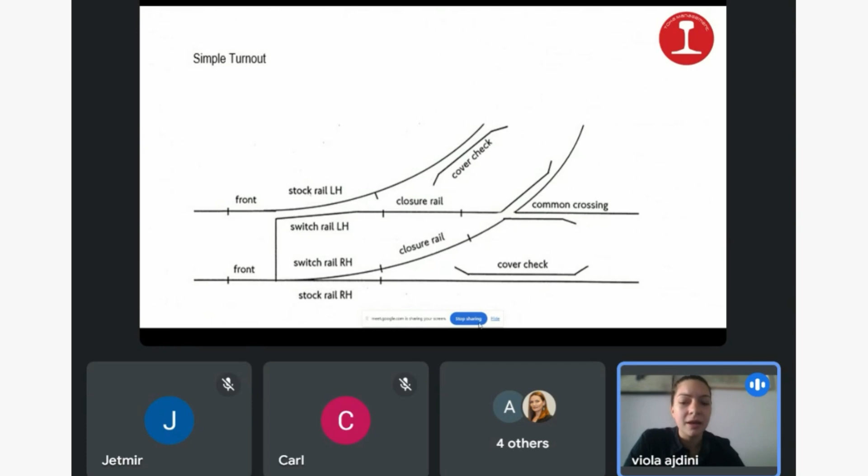Thank you for joining us today for what promises to be an insightful and engaging webinar. We're thrilled to welcome our esteemed guest speaker from Northern Ireland, Carl Hoey, an expert in the field of railway operations and inspections. Britain has had a long-standing and fruitful relationship with Kosovo, characterized by ongoing investment and collaboration across various sectors. This partnership reflects a shared commitment to fostering growth and development in Kosovo.

We're excited to see railway knowledge becoming a vital part of this investment. As we work together to enhance the infrastructure and safety of Kosovo's railway system, we believe that the transfer of expertise and best practices from Britain will play a crucial role in shaping a more efficient and reliable transport network. By integrating this knowledge into our ongoing projects, we aim to strengthen the ties between our nations and contribute to the sustainable development of Kosovo's railway industry.

At Toka Training Center, we believe in the power of knowledge sharing to advance the railway industry, and we're excited to leverage this platform to foster growth and innovation in Kosovo's railway sector. We're committed to raising the bar in railway professionalism and safety. Our recent initiative has led to the establishment of a new standard of profession that's been officially approved by the Ministry. This marks a significant step forward in our mission to enrich the railway sector in Kosovo. We're dedicated to ensuring that every aspect of railway operations is meticulously accounted for, and we have plans to develop many more standards that will further enhance the railway profession.

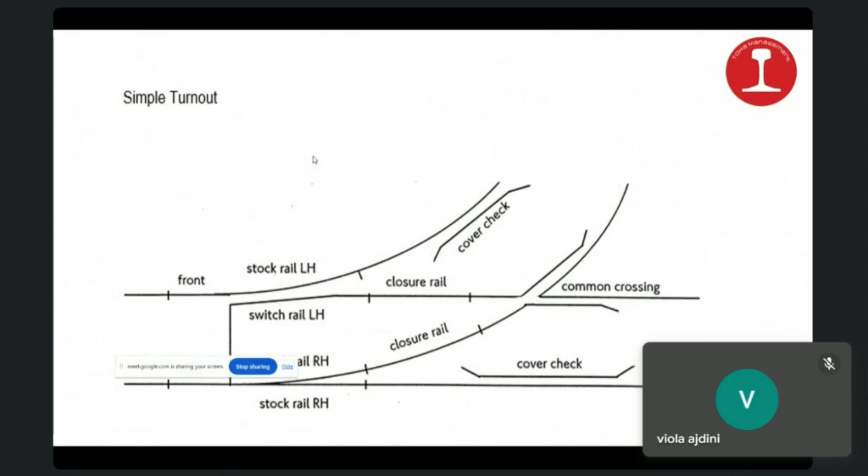On the screen now you have a simple left-hand turnout, and the inspectors will have to get to know all the components that they're going to inspect and what all the nominal readings are. I would expect all inspectors to know the nominals, and then whatever standards are applicable to your railway, that's the standards they will apply when they have gained the nominal readings.

So the inspectors will do an initial 10-minute walkthrough going through the P&C, and what they're going to be looking for is any emerging substandard conditions that may require immediate actioning.

So the inspectors, for the safety of the line, they're going to be looking for broken switches, broken rails, broken joints, broken welds, anything that's going to immediately stop the traffic, and broken crossings.

And then what the inspectors are going to do, if in fact they have found an immediate substandard condition, is action it straight away. And in the event that they have not found any emerging substandard conditions, then they will start their inspection.

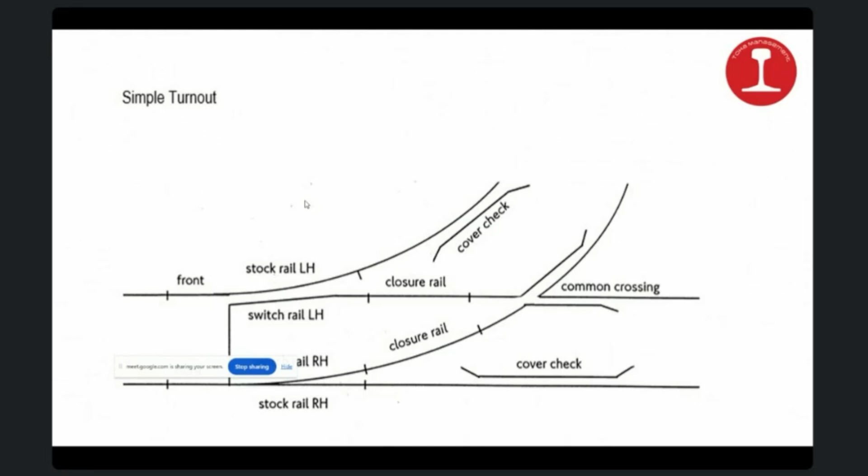What you'll always find with the fabricated common crossings is the point rail will always be attached to the most commonly used route. And the inspector, when inspecting the crossing, will be looking for major defects - any cracks or breaks, any loose, broken, missing, or damaged components within the crossing layout itself.

He will also do a full inspection from the wing rail fronts until the heels of the crossing. Every fault that he finds, he will record on his paperwork, because every inspector will have with him a copy of the previous inspection. So he is already aware of a lot of the defects within the P&C, and what he's looking for is new defects within the P&C.

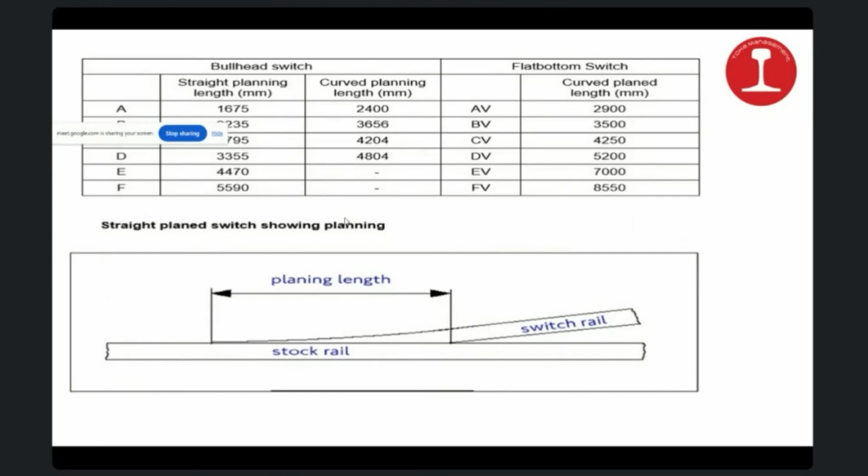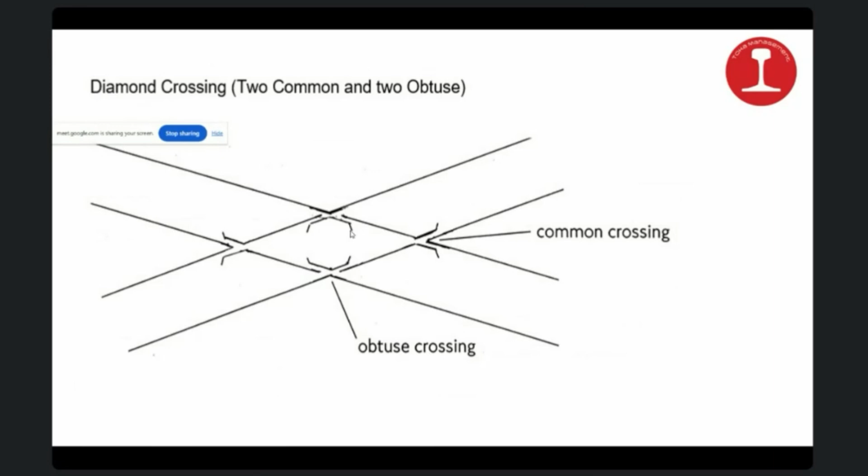And here you have the diamond crossing with the two common crossings to the sides and the two obtuse crossings above and below. All good junction work inspectors will be able to recognize all different styles of junction work layouts that they're going to go to inspect. This is all captured within their mentoring processes.

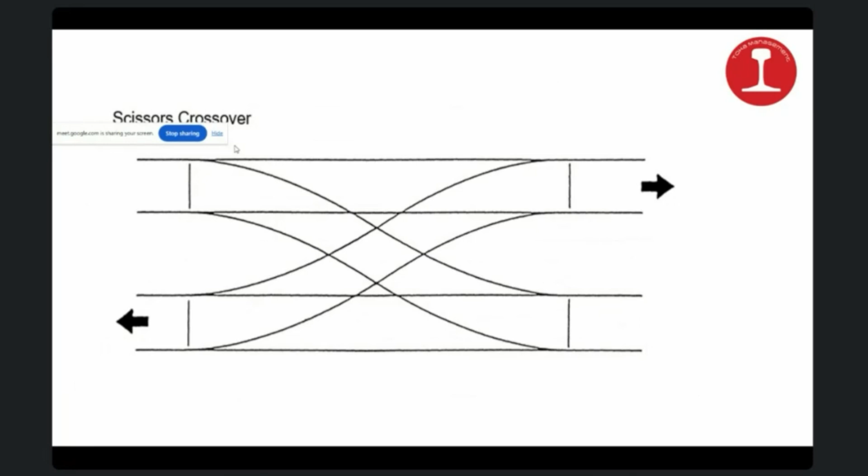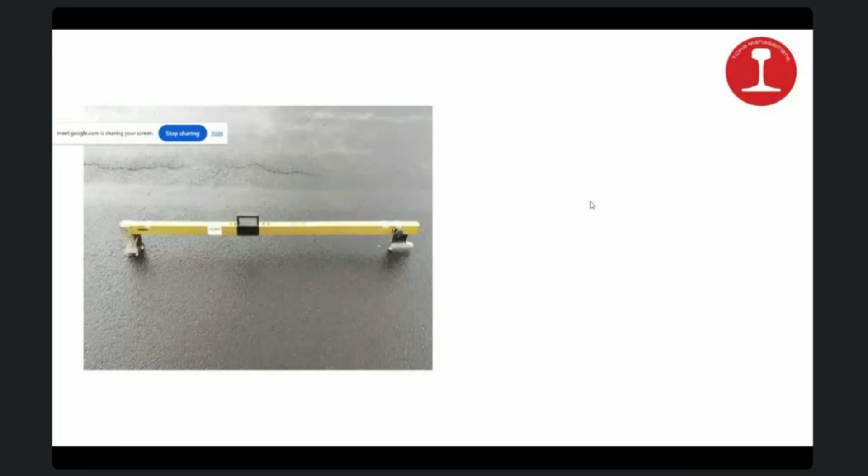Next we have a picture of the Geismar track gauge. This is the most commonly used gauge that we have for doing track gauge and track cant readings. All inspectors will attend a training course which will give them a license to use these gauges. All gauges will be calibrated for 1 year, and inspectors can also check the gauge on track in a self-calibrating routine, just to confirm that the gauge is within working specifications.

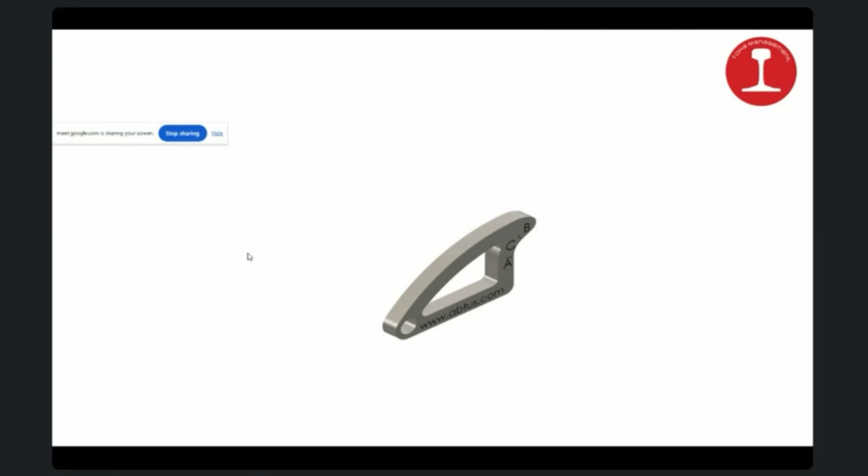The next gauge the junction work inspector is going to use is called the P8 gauge. The P8 gauge replicates the profile of a wheel flange, and it will have a marker for the 60-degree line, which is the critical line for coefficient of friction that can allow a train wheel to ride up the actual switch rail and derail the train.

So what we'll do with this gauge is test along the switch rail, adding any hogging with the stepped gauge to allow you to get an accurate reading, and we would use a 0.3mm feeler gauge with this.

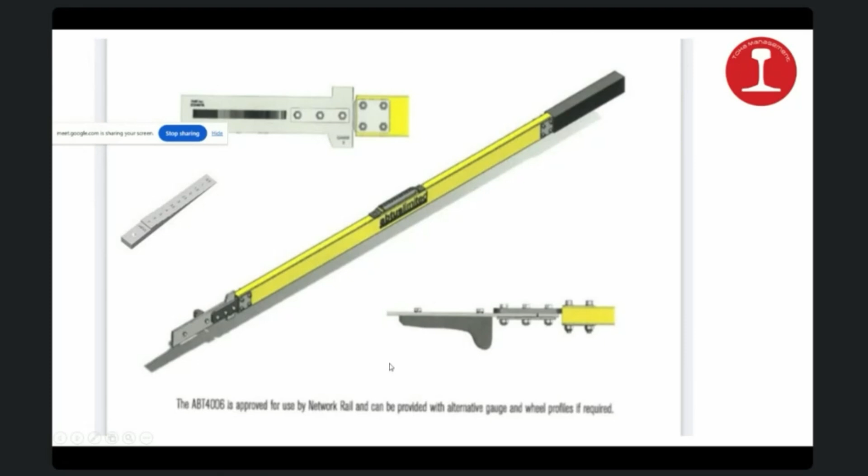Next, we're going to move on to the switch itself. So we have our 5 critical hazards on the switch rails.

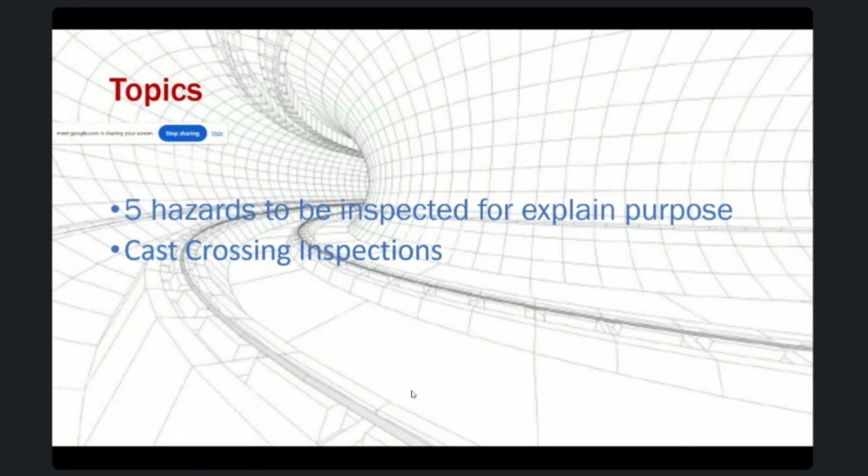The first critical hazard is a side-worn stock rail with a little used switch. The second hazard is the stock rail and switch rail are both side-worn. Hazard 3, the stock rail head wear is associated with a less head-worn switch. Hazard 4 is switch rail damage. And hazard 5 is the switch rail with a sharp gauge corner profile. This is where we would use our Pac-Man gauge.

We want to see contact at point A and point B, but not at point C. We're going to jump onto some slides now because this inspection is our best way to prevent derailments at switches. The reason we have a lot of derailments at switches is because our trains are only designed to go straight. Once you move a train to a different direction using switch rails, the hazard then becomes the train wanting to derail. So what we do is these inspections so that we can be aware of any wear patterns along the rails that may instigate a derailment of a train.

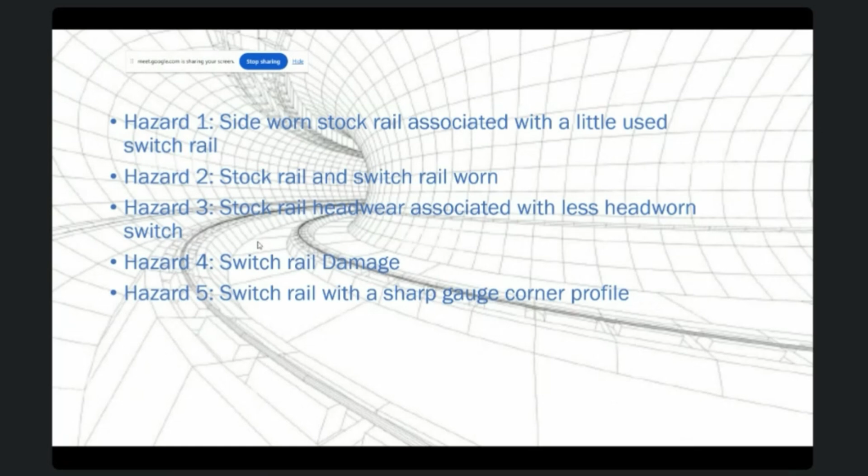You can see on this diagram where you have 3 different setups. Starting at setup 1, you can see where the stock rail has wear and the switch rail has very little wear. This would allow the 60-degree line to be very high up the switch, which could potentially lead to the train wheel riding up the switch and derailing.

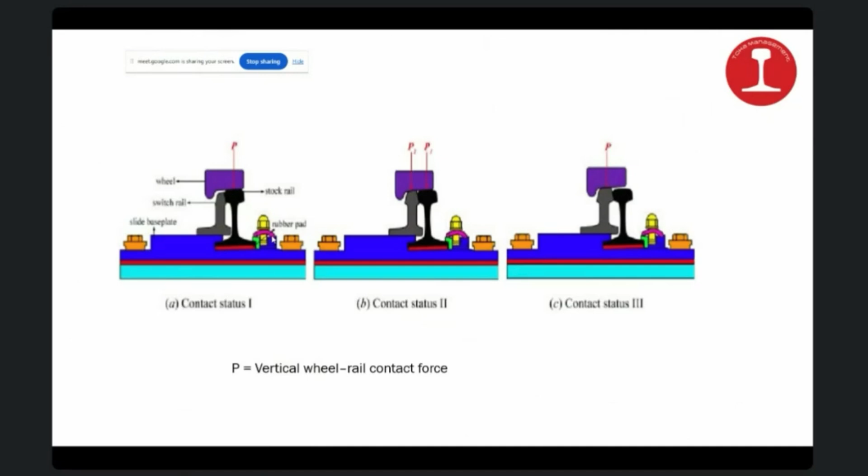You can see contact status 2. The switch rail and the stock rail are both head worn, so they're worn to the same limit. Then on contact status 3, you can see that the stock rail is now heavily head worn and the switch rail is head worn less. On this style of defect, the potential is for the train wheel to enter the switch and strike the switch before it goes into the turnout route, again causing the train to derail.

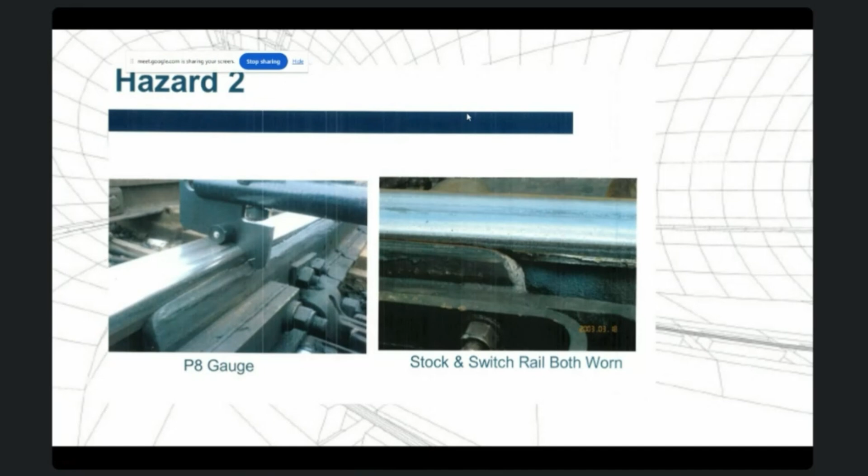Because now what they've added to the P8 gauge itself is they've added the traffic light system. So green to the upper scale is good, and red to the lower scale will be bad. I've added an additional picture of this so that you can see it on the more modern style gauge. You can see from the second picture where both the stock rail and switch rail are both becoming side worn. So here you have the more modern gauge.

So what you would do is monitor how much it fails by during your inspections, and then you would program in the relevant switch rail reprofiling before it fails. To help the inspectors with being in from the 60-degree line, which is white, to the green zone, the inspector will know that the switch is safe and it's not worn beyond limit.

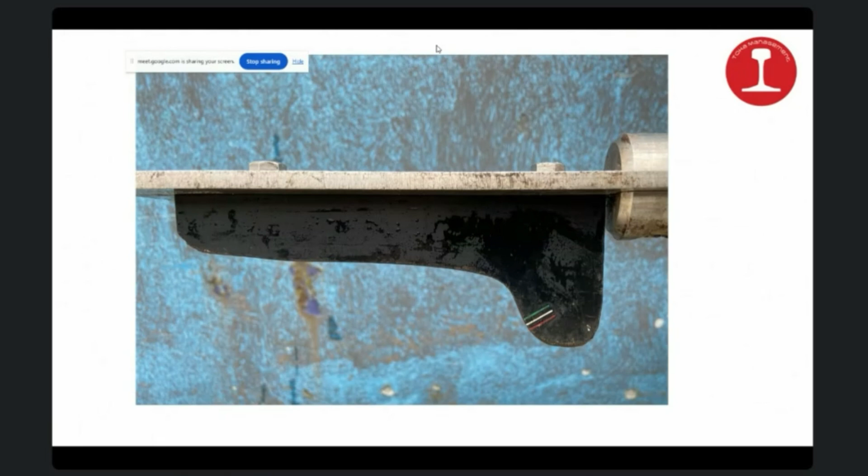We measure the first 40 mil to ensure the first 40 mil along the stock rail is below the depth required by gauge 1. Again, when this fails, the junction work inspector will be monitoring it to ensure that the failure is preempted before it has failed. So when it is approaching the failure limit, he will program in the reprofiling of the switch rail, because that is the remedial action for when gauge 1 is failed.

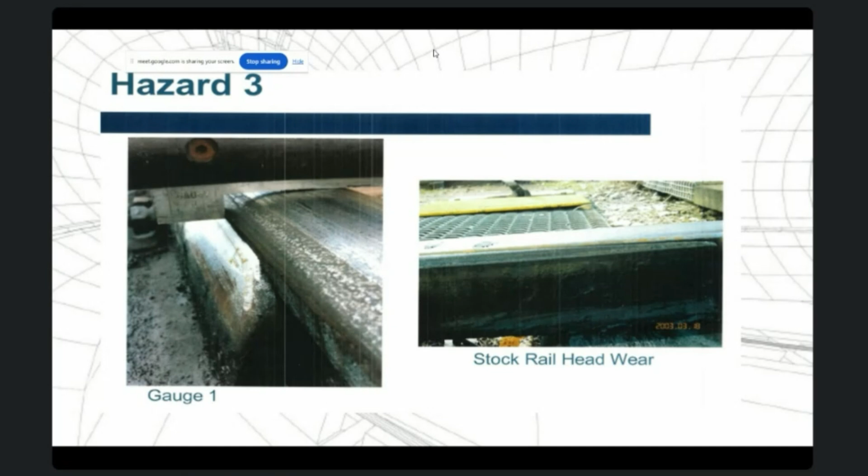The next hazard is hazard 4, which is switch rail damage. With gauge 1, gauge 2, and the P8 gauge, the inspectors must always remember to add any hogging. Hogging is the gap beneath the switch to the slide chair. So the inspector himself, when he starts this inspection, will have recorded all of the gaps and he'll have them on his form, and as he goes along with each gauge, he'll add the gap to the gauge, and that will give him a true reading of what the gauge is telling him.

For gauge 2, what the inspector is looking for is gauge 2 to be above any damage on the switch. When the gauge is above, that tells him he has a critical aspect and that you now have the ability for the wheel flange to climb the switch and then derail the train. With all of these hazard aspects, what we're trying to do again is prevent train derailments. And you can see from the pictures the styles of all these different features that are going to induce the train to derail.

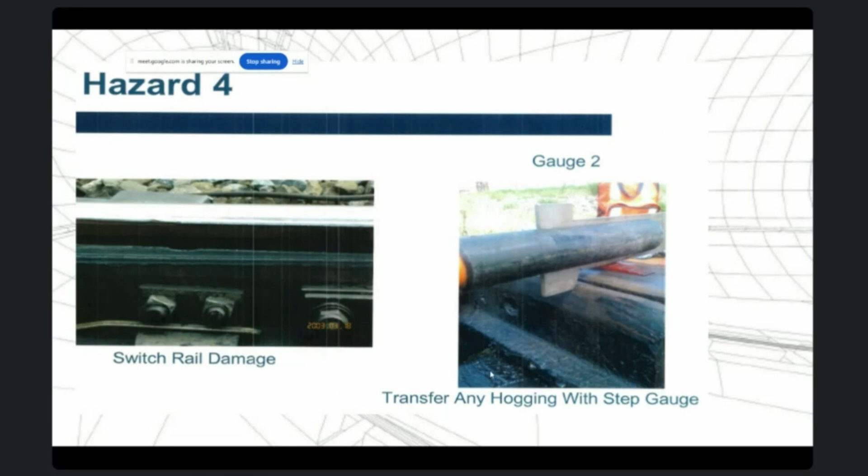So hazard 4, again, the remedial action will be to reprofile the switch, and the reprofiling may include welding of any damage.

Next, we move on to hazard 5. Hazard 5, as you can see on the gauge, you can see point A, which would be the lower section, point B, which would be the upper section, and then point C, which would be right in the corner. And you can see from the first picture on your left, the tactile edge. That tactile edge is what's going to derail the train.

The train is going to grab onto that tactile edge. If it's dry, it's been non-lubricated, and then the train flange wheel itself will ride up it and derail the train. And you can see from picture 2 as well, you have the same kind of tactile edge, but it's lower down the side of the switch rather than higher in the first picture.

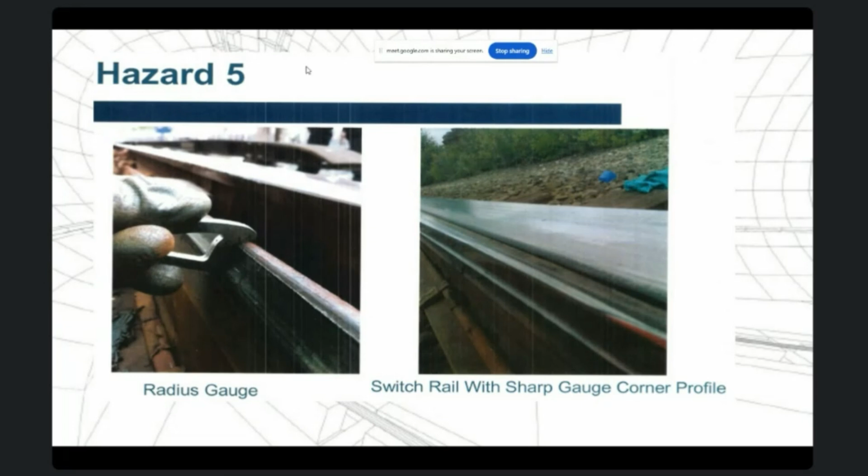So next we're going to move on to risk assessments, control measures, and mitigations. All P&C is risk assessed. So the inspections themselves on our junction work should be carried out every 4 weeks. And the inspection managers for them areas will risk assess every set of junction work so that he has the correct time scale to do his junction work inspections.

So if he's got, for instance, a brand new layout, and it's been inspected a couple of times, the inspection manager will go down, carry out his risk assessment, he'll look at all the faults, he'll assess the frequency over the junction work, he'll assess the tonnage over the junction work, he'll look at all the faults, and if he can, increase his inspection regime. So rather than inspecting them every 4 weeks and repeating the inspection with very, very few new faults ever being reported, the inspection manager could risk assess that inspection out to 8 weeks and then out to 12 weeks.

And any type of control measures needed may be if a set of junction work that is on a 4-weekly inspection is suffering multiple defects where you cannot reduce the inspection. You may have a loss of clips, you may have poor top and line, you might have an instance where the bolts come loose more than a scheduled inspection. What the inspection manager may do is implement a supplementary inspection.

Now, he may have long welded rail, he may have continuously welded rail, or unstressed welded rail if he's near a platform. We tend to use unstressed welded rail through platform grounds. The continuously welded rail may be used between stations with the long welded rail.

Now, the junction work inspector, he may have adjustment switches or he may have expansion switches, and he will be trained how to measure these to know that they're in a safe condition. So he may have to measure gaps, he may have to measure overlaps, and he has to know what the critical aspects of these are.

And it's the same with the unstressed welded rail, where he will have expansion switches, he will have to measure the gaps and the overlaps, and also look at the general condition of the track. He's looking at the sleepers, he's looking at the fastenings, he's inspecting the ballast profile in the four-foot, the ballast profile on the shoulders. He's inspecting the sleeper conditions.

He may have wooden sleepers, he may have concrete sleepers. The more modern words for them nowadays are bearers. I've always known them as sleepers, so I just continue to refer to them as sleepers, but you'll hear them being referred to as bearers as well. So these will all be added.

Normally, the junction work inspector, he would be inspecting 20 meters in front of his junction work, and he would be inspecting 20 meters behind his junction work on both routes. And then through his junction work, he would be taking all similar inspections. He'll be taking track gauge, he'll be taking track cant, he'll be looking at the top and line through the entire junction work, and he'll also be recording all the faults on his sheets as he goes through the junction work.

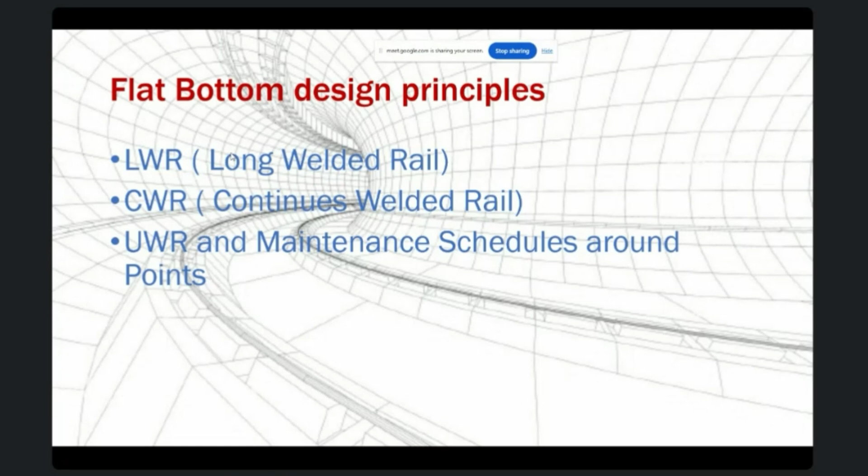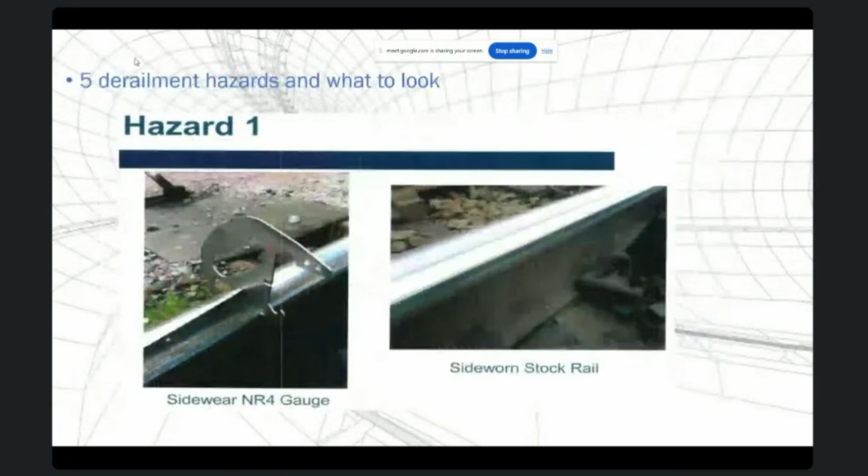The inspector himself, he will get a copy of the previous inspection. He will get all the paperwork. He will get any other paperwork that may be relevant to what he is going to do. He may get the track recording vehicle faults. There may be a fault bank for reported faults from non-track staff.

He will gain the track staff fault bank, and he will take all this paperwork with him when he goes down the track. Then when he goes down the track, he will get permission of the person controlling the points, and he will then take control of the points, because what he's going to do is he's now going to inspect the points.

He's going to take the track gauge and cant throughout it. He's going to measure all the joints. He's going to measure the wear through the crossings. He's going to inspect the check rails. He's going to look at the check rail gauge. He's going to inspect all the flares, the entry flares, the exit flares, and he's going to record all the readings on his forms. As well as this, on the switches themselves, he's going to take additional measurements and additional inspections that have been deemed critical for us to do to prevent derailments.

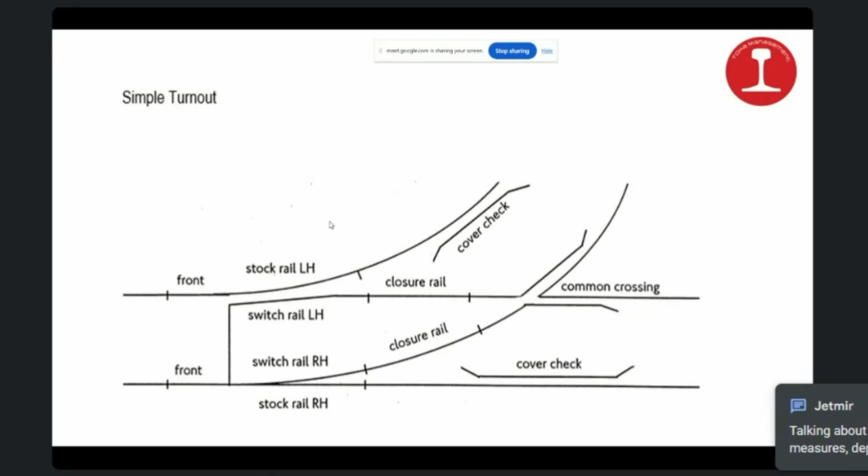Now, over the years, there's been different processes for greasing the actual rails themselves. The more modern style that we're using now is that we grease the first 100 mil of the tip of the switches, 1200 mil in front, we grease 100 mil, and 1200 mil into the switch, we grease 100 mil. And that is with an approved railway grease.

As well, the junction work inspector is now getting additionally trained. So when he's doing his stock and switch inspections, if he finds the hazards of a switch failing with the P8 gauge for more than 200 mil, or switch rail damage in more than one place and over 200 mil, the junction work inspector himself can then implement an additional inspection where he does a detailed switch inspection. And this can happen on the same shift. And he will then record all different aspects, from the switch hogging to gauge 1, gauge 2, and the P8, as well as the NR4 gauges. And then he will submit this for any remedial action that he may find that the switches may need.

And something that I wanted to talk on was the process. So to become a junction work inspector, first a junction work inspector must start as a track inspector. And he will attend a track inspector's course, he will do that for 1 week, and then he will go for mentoring. And after his mentoring, which may take up to 6 weeks, he will then get assessed.

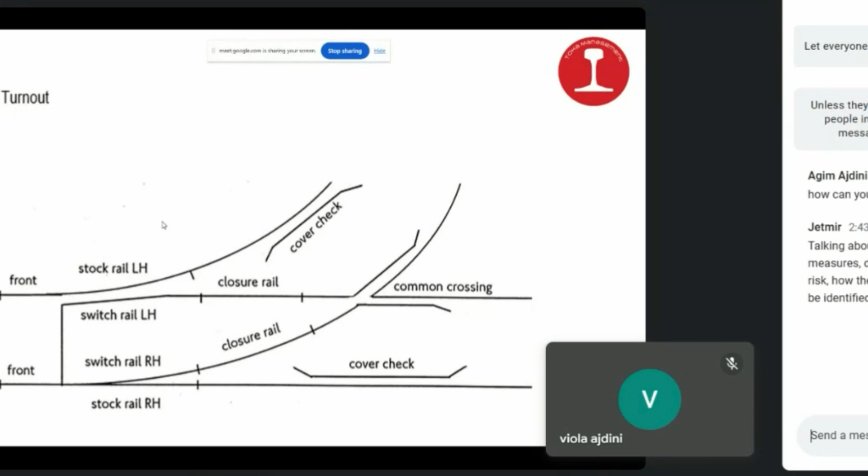And now during this process, he's going to gain lots of railway component knowledge. He's going to gain the start of his inspector's career with looking for loose, broken, missing, defective components. He'll learn about track design, not detailed, but he'll learn how the track should look and how everything should be put together so that he can report the faults on his inspections.

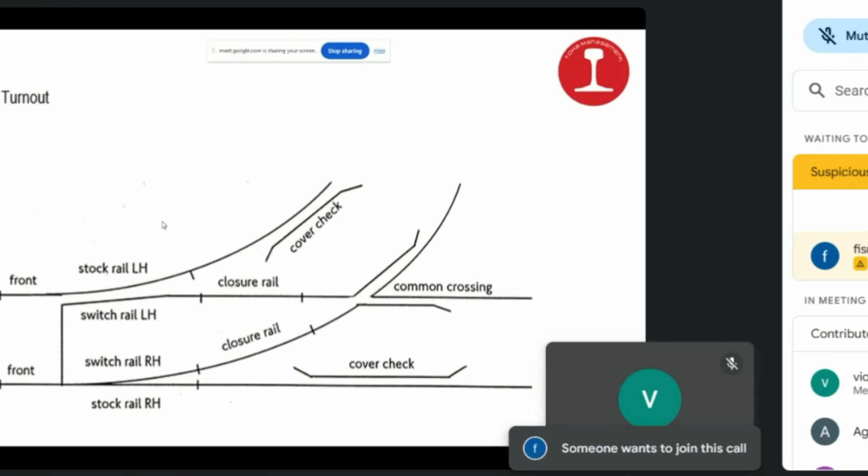And then after a period of time where he's gained enough railway experience, he will then move up to become a supervisory plain line inspector. That's where he covers all the plain line, but now doing measured, detailed inspections, similar to the junction work inspector, but on plain line. And now that he's acquired this accreditation, because he will have done also a 1 week's training course, he will then have attained a gauge training course. So he will learn how to use all the gauges, and then he will be mentored for a period of time until he's deemed ready to be assessed and gain his qualifications.

And at this point now, the track inspector, who has become the supervisory plain line inspector, will now become the supervisory junction work inspector. So then he will now go back onto another 1 week training course. Then he will be mentored for a period of time until he's deemed adequate to do the assessment for junction work inspector, and then he will be assessed.

And you think these periods of time can be up to 7 years of the inspector's life, learning all these different skills. And then after this period is when he gains his experience and his knowledge, which then gathers him through his years, being the next process step, which would be inspection manager after service of time.

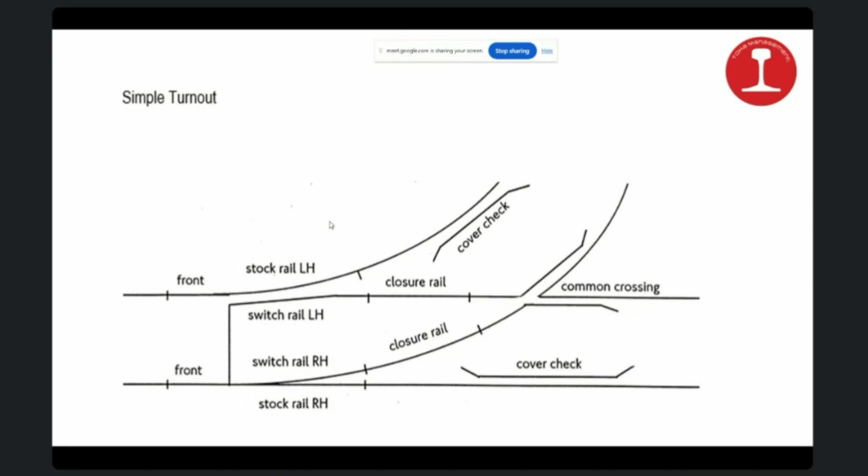So as well, the inspector, looking at all the different types of components, the junction work inspector, as he does his inspections, he'll be looking for all different types of defects. He will be measuring, taking detailed static measurements of the track gauge through the crossing. He will be measuring the flares on the cover check, measuring the flange way on the cover check, and then he'll also be taking the cover check gauge readings throughout the crossing itself. All these will be recorded on his form.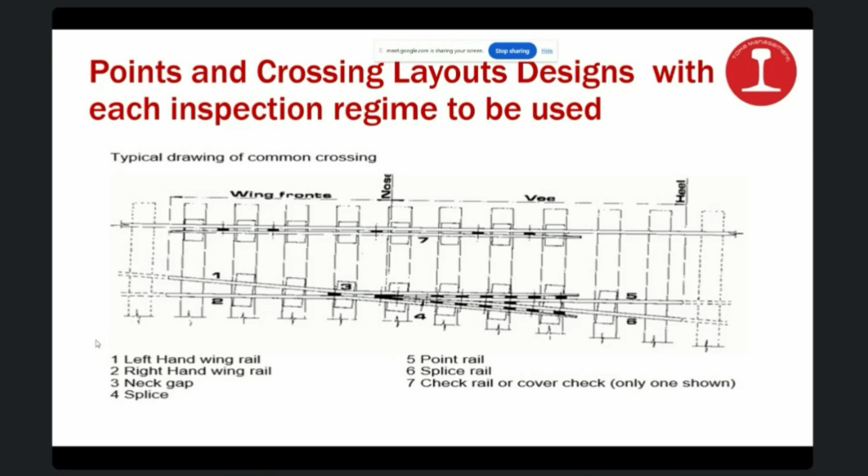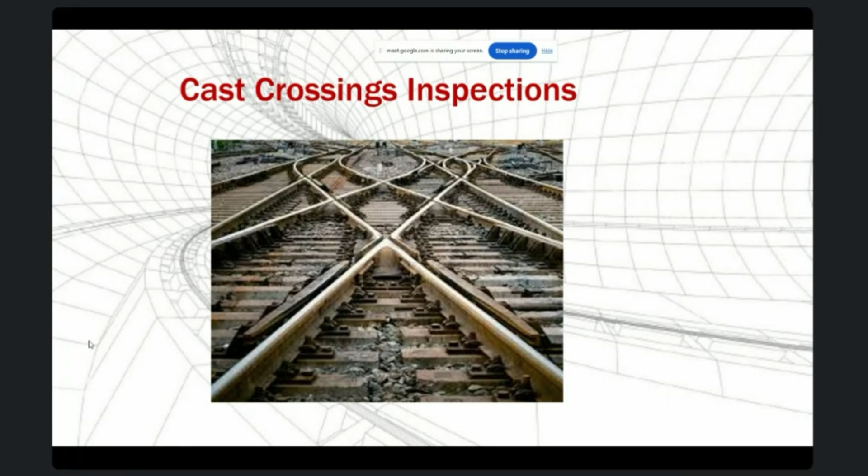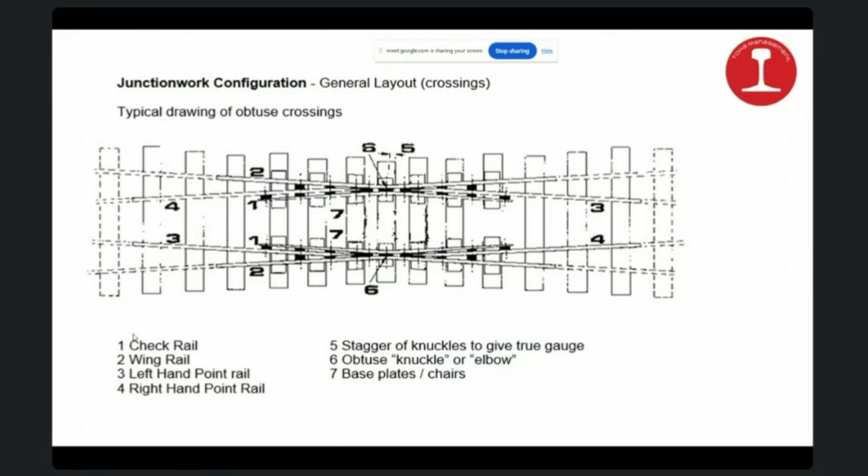When doing his detailed inspection through the cast crossing, he will use the previous inspection form, and all the points where he's going to do his measurements will be marked out. So he will follow the previous inspections for all cants and gauges, and he would do the same process as he would for a simple turnout when doing his inspection. Everything would be recorded on the previous inspection form, so any changes would be noted. The same would be for the obtuse crossings, exact same for the common crossing, exact same for the diamond layout. Everything is from the previous inspection.

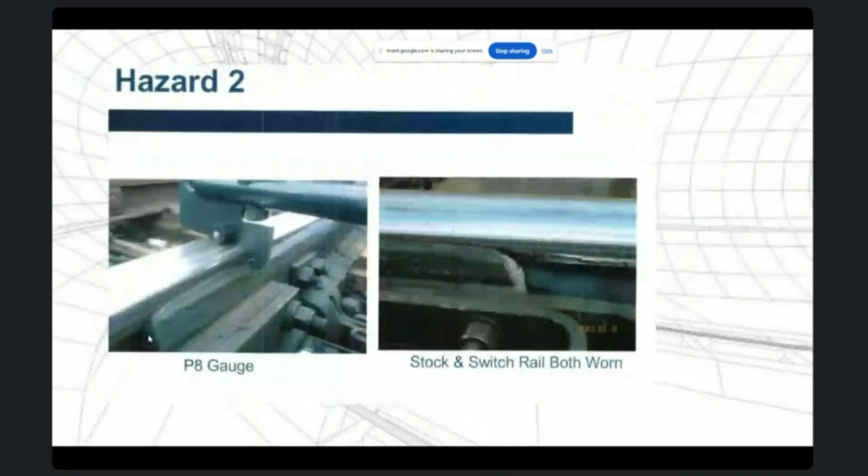Now I'm going to move on to the discussion stage, where now that everyone has seen the process of how you become a junction work inspector, all the training that the person goes through, all the mentoring the person goes through, and then the assessments for each different level of accreditation that the person will go through. If there's any questions about the hazards, any questions about the crossing inspections, let's discuss them. I'm going to stop sharing the slideshow now, and we'll go to the questions.

Thank you, Carl. I'll read out some of the questions that came about. We'll go one by one, and then I'll let you answer each question as I read it. Does every set of points have its own unique risk assessment?

Viola, can you hear me? Yep. Does every set of points have its own unique risk assessment? Can you hear me, Carl? Carl, can you hear me? Okay, I can see the questions now.